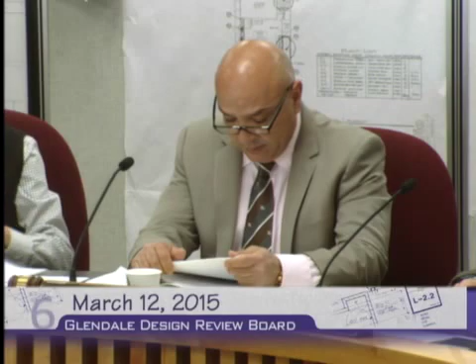Thank you, Vilya. I'm going to turn it over to Ms. Kathy Duarte for 1045 Linden Avenue.

Board members, the property at 1045 Linden Avenue, you can see from this map, is located south of Glen Oaks Avenue and north of San Fernando Road. It is located in our R2250 multifamily residential zone, on the west side of Linden Avenue.

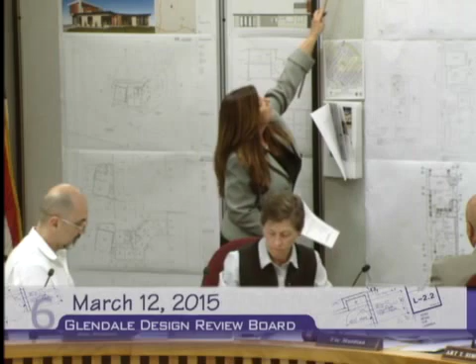If you look up here at the existing site plan, there's an existing approximately 900 square foot single-story Tudor-style home at the front of the property. The driveway goes back. There's an existing garage, a one-car garage, an existing orange tree, and then an existing rec room at the very rear of the property.

The applicant is proposing to demolish the existing garage, the orange tree, and the existing rec room. At the front of the property, with the existing one-story per code requirements, they will be adding a new 2-car garage.

And then at the rear of the property, they're proposing a new 2-story, 2,276 square foot unit at the rear with a 3-car garage that fronts the alley. Access to the front would be on Linden here, for the front of the property, with the driveway going along the side.

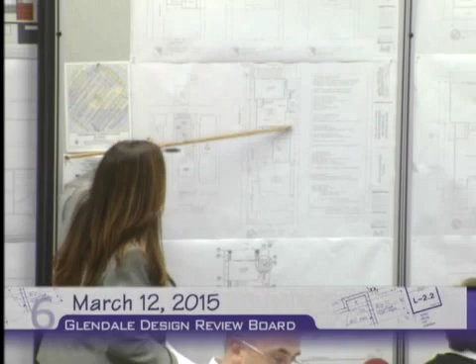They are meeting all the current zoning code requirements. They have the common open space located in between the two units, and each unit will have a private patio.

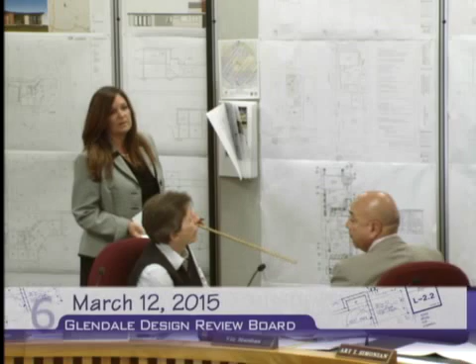That's in terms of use. So I mentioned that the property is located in the R2250 multi-residential zone. Most of the surrounding properties are also zoned R2250.

The landscaping will meet code requirements. They're proposing approximately 30% of the lot be landscaped, where 25% is required.

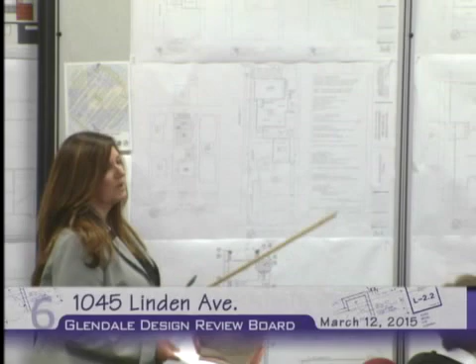There's an existing wall along the west side of the property. They're proposing to demolish the existing chain link fence, remove that, and add a concrete masonry wall.

Staff is proposing that, because they're proposing it be stuccoed on one side, staff is proposing that it be concrete on the other side, facing the neighbor.

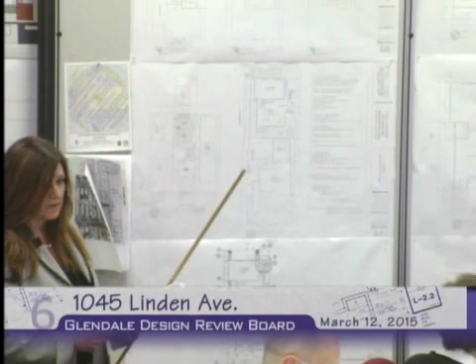When you say concrete, meaning it's a masonry wall, so exposed masonry. Our typical request there is to use the split-face block. We thought split-face wasn't as appropriate on the side facing the subject property, so they would stucco that face, and then the split-face, which we can't paint, would be a nice finish for the neighbor. So it'll be split-faced facing the neighbor.

Moving over this way, we have the proposed floor plan for the existing house here, with the elevation drawings here. You can see they're adding on the garage over here. And then these are the floor plans for the rear unit here with the elevation drawing here. As you can see, the styles are a little bit different.

And while the Tudor style is different from that of the proposed unit, we feel it would be difficult to design a compact two-story unit that references earlier style without overwhelming the adjacent neighbors. And the height of the new unit is actually lower than the existing unit, so it should be hidden behind it.

Also, the inverted roof angles of the new unit can be seen as a playful take on the Tudor roof forms. And in addition, there are a number of 2- and 3-story multifamily dwellings in the immediate vicinity, including a 2-story structure directly to the east of the property.

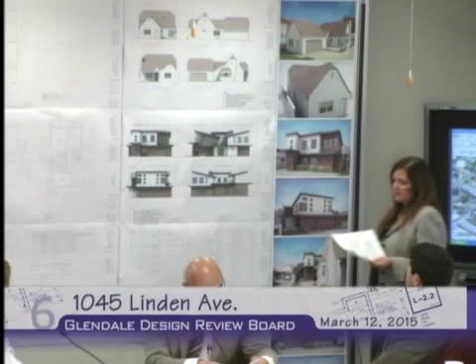That's my presentation. If you have any questions, or if you want me to go over the conditions.

Is the trash area enclosed in the back there? I believe it's behind the fence. It looks like it's open as well. Is it behind? Where, the trash area? Yeah, right adjacent to the garage. To the right of the garage. Right.

Maybe he could answer that. Is that the only location for that trash area? With unit 2? I think so.

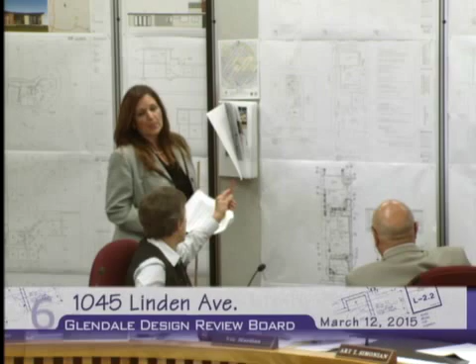And the other question - that wall they're proposing, does it only go to the front of the rear unit? I believe it ends here. And what are they doing with the little 20-inch wall that's along the side now that goes partway from the front street? It's not showing there. But there is a wall - maybe he could address that. Any questions?

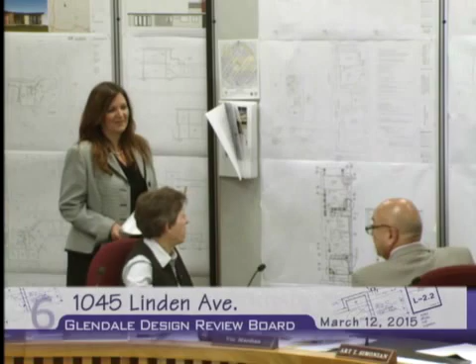I'm trying to understand - it says new unit, 2-story, 2,276 square feet. Then on the side it describes the proposed total floor area as 3,185. So I'm assuming he's adding the existing and the new together. But my question is, was the 3 parking garage a requirement by the city or their own requirement?

It is a requirement - based on what? Because it's in the multifamily zone, based on the number of bedrooms. So based on number of bedrooms they need to have, okay.

The 3, then the 727 square feet for new unit garage - that's not like the residential where you're going over a certain number and you get added onto the floor area, right? Or is it just - correct, okay, because it's required parking. It's not livable floor area.

So but it's included in the calculation of the floor area when - no, it's surface, not park. Where is it? I think usually when you have a garage, it's on grade, the garage area goes into the floor area ratio, but I don't think - oh, well no, it goes into lot coverage, not in the floor area. That does go into floor area ratio because it's on grade - it's part of the, based on what I understand.

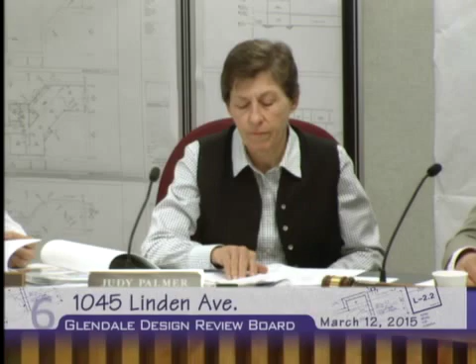Second question: is that little wall in the front off the street on the left side of the driveway going to remain? That's actually on the neighbor's property. Oh, that's the neighbor's? Yeah, exactly.

I was over there yesterday, and I was wondering how you get out of the garage without making 3 turns to come out of the driveway. It appears, as you back out past the patio, you've got to move 3 times. Right, I mean right now we just back out. That's the existing condition, that we just use the garage.

Everything is as far as the backup space, the 26 feet, I believe, is there. It's 25, just right, an awkward position. There's really nothing we can do about that turning radius.

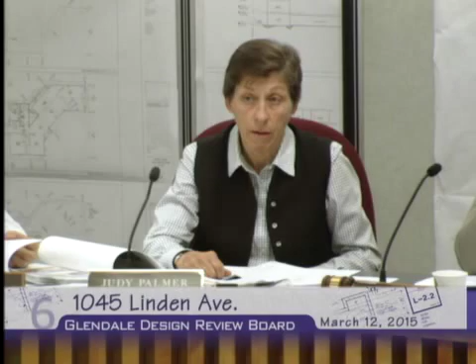Could take away that little patio. That's where the corner becomes an issue with the existing patio, which is part of the private space required for the house. We're required to have 50 square feet, but it could be smaller. I'm just saying that corner doesn't allow you to get out.

Sure, just a question. We can. That's all the questions I have.

On the same note, on the trash area, where's the front unit trash area? It's all supposed to be just one. So how do you access the trash area from the front unit to the back? We have a walkway on the side, so you got to go to the alley, then come in. But you propose landscaping in that area, and if I have these trash bins, I'm going to roll them, what happens to my landscape area? There's no designated path for that particular trash area.

There is a concrete path along the left side of the property coming up from the driveway, but when I come back to the other side where the trash is designated, it's all landscape based on the landscape plan. Oh, I see. We need something's got to happen there. Absolutely, we can make a part of it paved so that works. On the landscape plan, landscape is where the trash is, because you can't put the trash in the right of way - it's just that they have it reversed. I don't know if this is just a different project that was proposed, and I'm looking at the landscape plan.

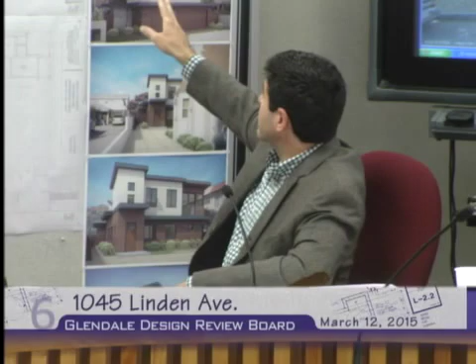So a couple of questions on that note - I noticed that on some of the color elevations, some of the windows, especially where this window is supposed to be in this bathroom area, I would imagine these windows are really going to be high windows like that. Have these been amended at some point? Is this like an older version? No, I think we are going to have the windows exactly like they are on the elevation. The ones from the bathroom are going to be frosted too. So in essence, they're going to fall more or less where the toilet is right now, the lower window. I see.

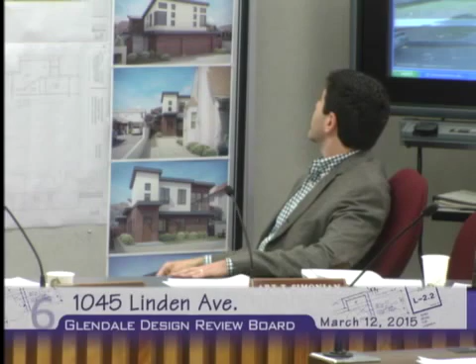And then in this rear elevation facing the alley, there's an abundance of windows. Is there a specific reason for all these square punch-outs? There are accents that accentuate the design, and we went back and forth several times refining it. But we definitely used the clerestory windows to show the heightened, vaulted space inside.

Are they all going to be clear windows, or are some frosted? The ones in the bathrooms are definitely going to be frosted. But besides that, everything else is? Everything else is going to be clear, yes.

And insofar as your bedrooms are concerned, they're looking onto a multifamily building. Have you considered what they're looking into with all those windows? Absolutely. I actually have a diagram here that shows the neighboring building and which windows match with which of the neighboring building's windows. The neighboring building is actually about 6 or 7 feet higher because they have a subterranean or semi-subterranean garage, so our building sits right in between their windows. Our second story sits right in between their windows. I can pass this on, if you'd like.

The ones in orange show the neighboring building, and the ones in green are our windows, and we made sure that nothing was looking directly into the other. So if we're looking out from your unit onto the adjacent property, we would see those orange windows. Got it.

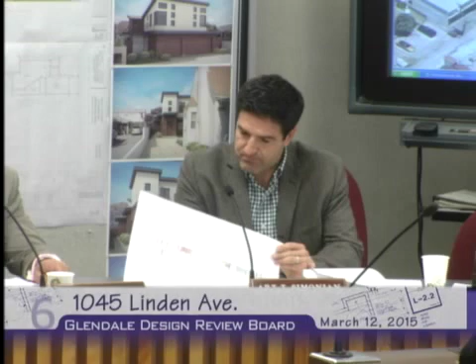As far as the setback, it's a 12-foot setback, separation from building to building. The 10-foot 11 I think was where we had an overhang on the proposed two-car garage for the existing unit that was overhanging a little bit there.

So I have another quick question. You mentioned you started out with Ms. Reich some time ago, about 3.5 years ago. Long time. Yes, it's been a long time in the making. And your original concept, was it more of a traditional concept? It was a Tudor style design, and it was humongous, just too big. And we came back and refined it to a more contemporary design.

And I think when we came back with Mr. Platt, we actually lowered the roof shapes. The lowest point is actually 7 feet, and we made those parts a closet on the interior, so that on the edge, on the higher parts, they're not too high. Your preference to go with the more contemporary or traditional? I would prefer them contemporary. All right, that's all the questions I have.

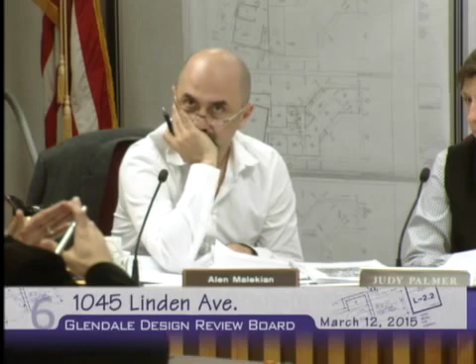Thank you. Just a couple of questions. Can you elaborate on this inverse angle you started talking about? What is that? Absolutely, we took the angle of the existing roof and did a 90-degree turn, and that was our original roof angle, and then we slightly adjusted it. It's not quite the same slope, it's a little shallower - it's a pretty steep slope on the existing house.

One more thing I should add is that the new unit is actually lower at the highest point than the peak of the roof of the existing unit. And it's definitely lower than the two-story building next door to the east.

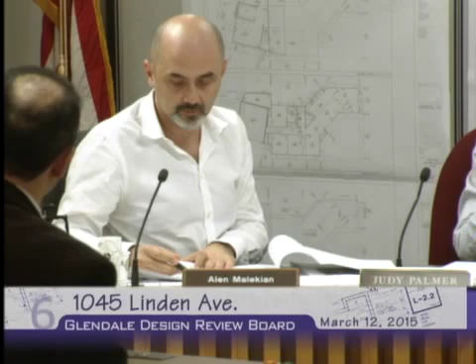So some of these, like the windows, as Mr. Simeon suggested, and some of these headroom heights - have you looked at these and addressed them in any way? For example, the 7-foot-one that you're showing in the studio, and you have a door right along that wall. 7-foot-one is not an allowed height in a habitable room. No, and we have a closet there. Well, there's no closet shown there. So if you look at your section, you have a 7-foot-one, and I'm just wondering about certain elevations there.

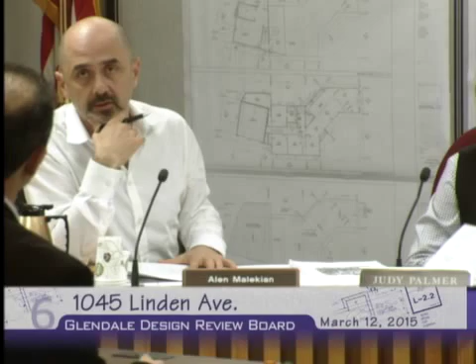In other words, the plan doesn't show a closet there. Well, it's not showing the closet, but it's showing the door coming in here. So if you look at the section through here, this point is 7-foot-one. So I'm just wondering, is that going to affect the angle of this arbitrary angle? And like Mr. Simeon said about the window, that window is right behind the water closet. So I'm wondering if you've looked at this code-wise, because these things are going to come into play and be dictated by building and safety. But I do believe 7 feet is the lowest point we can go. 7'6" is the minimum habitable height.

I'm just wondering, because looking at the design of the project, it has some symmetry in certain portions of the house or structure, and then as it comes around, the symmetry goes away and you start adding certain details that aren't carried through all around.

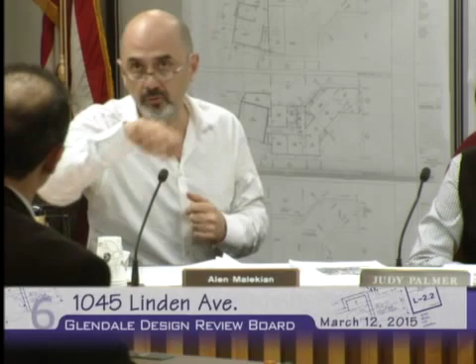So I'm just wondering, have you gone through this in a code sense with building and safety? After you've had a whole review of these drawings, is it not going to really impact the design we come up with at the end? Have you done that? Do you feel comfortable with what you have?

Right, we've been going back and forth. Well, I'm not talking about planning, I'm talking about building and safety. As with every project, if it goes through plan check and there are changes that affect the design, it's brought back to us, we review it. If we deem it a minor change, we can approve it at staff level. If it's too big a change from what you've approved, we'll bring it back to the board.

Okay, alright, thank you. Thank you, I don't have any other speakers. Thank you, Mr. I don't have any other. Oh sorry, you can, I forgot to mention something if I might.

I did receive four written emails in support of this project this afternoon, which you have copies of, and I also received one phone call as well in support.

Okay, thank you. All right, I'll close the public hearing. I'll start with Mr. Malekian. Thank you, sorry, open up the dais.

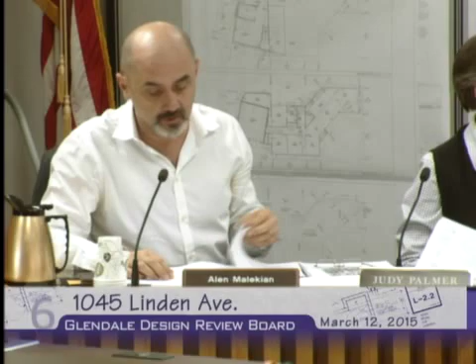I could very easily say it's probably the first project I've seen in many, many years that has an addition to an existing property that are two completely separate architectural styles. Usually I don't get into the style of architecture, I'll just leave it up to the applicant, but in this case it's just given to us, here it is. You have this very traditional, thick architecture, and then you're being proposed something completely new. I wish we had a complete wall between them so you'd have two separate buildings, but we don't, so somehow we have to look at this whole thing as one, being that they're both being presented to us, especially that we have a garage added onto the front of the unit.

So I'll go ahead and comment on the front unit first, then I'll go to the back, and then comment overall on my thoughts. For the front, a couple of concerns were the trash, which was addressed, so I think we can definitely address that, and also the turning radius around for the garage.

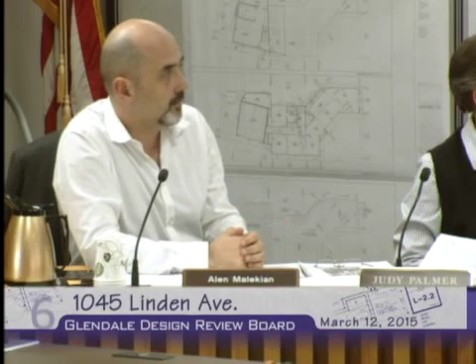I'm not that concerned about this because it follows the architecture of the existing building. The concern I have is that the structure being added, because it's following the existing roof lines, is creating this huge mass in front of these spaces that are very close to the habitable space on the other side of the apartment. So they're basically creating a wall in front of it, which is fine, I don't have an issue with it, but it is following the roof line, so they are following some of the profile, I guess you can call it.

If it can be somehow massaged or mitigated, I would really like that. But at this moment, the way it's done, it's fine. That's the only thing that stood out, and I was a little concerned, especially that perspective on top, you can kind of see how big that roof line structure is going to be. So rather than just carrying the existing roof, the lower roof over to carry for the garage, that was one concern I had on the front.

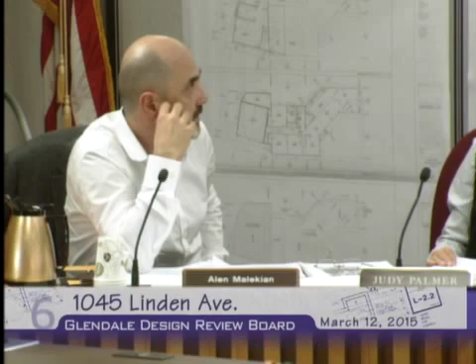Looking at the back, I'm personally fond of modern architecture. I love seeing this, but I also like to see a design that is throughout and consistent with all the details being proposed, which in this case they are doing. I think all the conditions around the house are well thought of, all the details are well placed together. But there are certain things happening that I'm just wondering, is it really necessary to achieve this modern architecture?

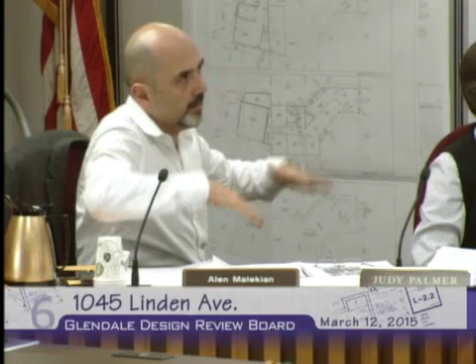I really don't see why, if this is going to be two different things, and if it's truly an inverted roof line, then let it be a truly inverted roof line, with roofs cutting through the space, creating morphed architecture that takes the existing roof and creates interesting spaces. But it's not—it's basically just a convenience of tilting the roof and sloping water back into the building space. For me, it's not doing anything. I'd be fine with just having a flat roof, playing with roof lines, and creating clean, simple, minimal, modern style architecture.

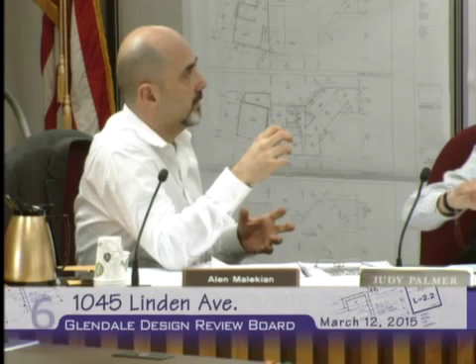Some of these windows—the placements and proportions of the windows—for me, again, it's questionable. These small little square windows, and the placement of them... I appreciate that it's helpful to understand where they placed the windows in relation to the neighboring property, but it's not helping the situation, because now you've created a window that is lower while theirs is up above. They're looking straight down into the space rather than if it was aligned at the same level.

I'm torn between the traditional and the modern, and how it's merging into each other. I think it's unfortunate it's taken three years for them to get here, and unfortunate that the person who was dictating the style is no longer here for me to ask questions from. But I'll just wait until I hear more comments from you guys, so we'll see where this thing is going.

Thank you, Mr. Malekian. Commissioner Palmer?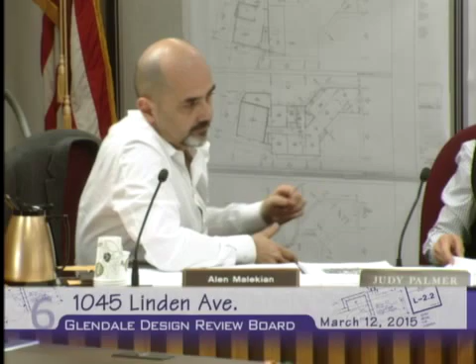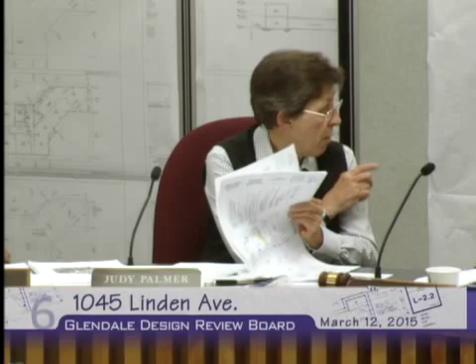I'm looking at the existing garage on the front unit, and I think that whole roof is a large mass. I realize it's matching the other, but when you look at the new garage at 90 degrees to it, it's also a very large structure. In the elevation, the top floor above the garage looks taller than the garage, and in section A8, the garage looks taller than the upper section. So I'm not sure which is correct, but those two units right next to each other being large, with a large flat face... and the house is always taller than the garage.

But in the elevation, A8 is... That's just one perspective, I think, from the street. I'm just saying the garage and the house—it looks large there. Okay, you won't see the garage from the street. I know, I'm just saying between the two units. I see.

I do like the design of that unit by itself. I'm not going to complain about that, but Alen's brought up a lot of points. I'll bring up that when I looked at the landscaping in the driveway area, the proposed driveway from the front shows planting along the existing house, but there's no room for it. It's drawn incorrectly here. The driveway is going to come right up to the bay window and go all the way over to the property line, so that whole side will just be all driveway.

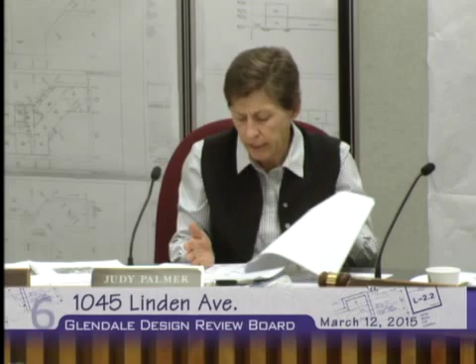They probably could have some planting, I don't know. They've shown trees where you have existing trees. I don't think the landscape plan matches the existing site. We've got palm trees in the front that really don't go with the building, and we have the tree and planting in the trash area. So I think that whole landscape plan needs to be addressed, as to the type of plant material in front of the front porch, taking out trees where we already have trees, and the trash area.

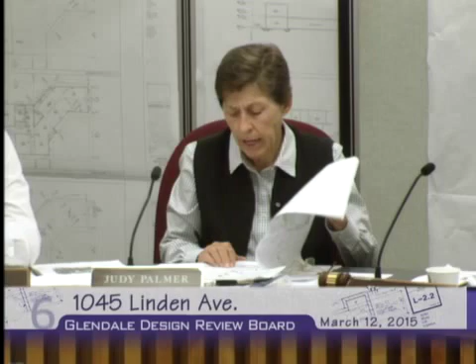I just wonder if that front porch on the existing house could be redesigned and changed, since it's just a little metal awning. We're going to have a whole new building, and to fix the front area—repaint it—maybe that metal awning might be replaced with something a little more attractive. So those are my comments thus far.

Thank you, Commissioner Palmer. Commissioner Simonian?

The reason why I asked some of those more personal questions about whether you were going to live there, and if this was your home, is I sensed we have a young designer who's been given the opportunity to design his home. We've all been there as architects and designers—it's a special thing to design your own home. It really is. You design something and learn a lot from it because you live in it all the time, so you live and breathe it, and you'll learn a lot from the construction through to how a house is lived in and the practicality of how windows are placed and how you access the home, etc.

And it's probably one of the most valuable lessons you'll ever learn in your career. What I'm sensing is there's this excitement, and you're trying to pack a lot of things into this house, so it's refreshing and it's appreciated. So in a humble way, we're going to share some of our experiences, to help you consider some things and see how it could be a more enjoyable place to live.

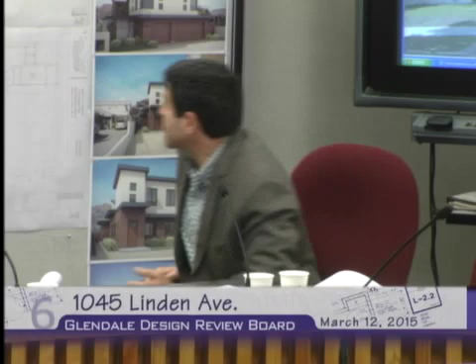What that will do is create—if your entry is more from this direction, coming in from there—some relief over here where you could actually back up and come in, making this turnaround a little bit easier. So you really want to start thinking about this entryway and creating a nice entry.

Right now you just have this kind of 5x5 box sticking out, and it's not a very attractive entry. I think you could work on that, integrate it into the courtyard a bit more, and make it a nice common open space with some privacy from the garage, while also making the garage more usable.

So those were kind of my thoughts—some of these windows are going to end up going away, as some of these windows facing the alley will probably end up simplifying themselves out.

Looking at the other side, at the multifamily building, this setup over here—we have 1, 2, 3, 4, 5 windows in this bedroom. In reality, once you start laying out your door swings, you're going to want to swing your doors inside, then lay your bed out with your credenza and all that, and you'll slowly get a feel for where you want to lay these out.

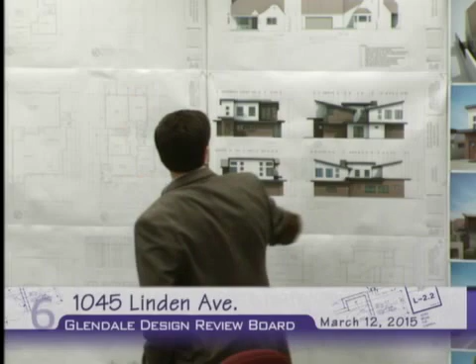So I would imagine this window, and possibly this one, and possibly these guys, are going to get eliminated. Once those are eliminated, the facade ends up simplifying itself.

But overall, I think, as Mr. Malekian pointed out, it's certainly odd to have this kind of mixture of old and new, and it's perhaps driven by Ms. Reich's comments, or maybe a young designer really putting everything he's got into something. But in itself, if you remove everything around it, it's a nice design—it's a contemporary home, well worked out.

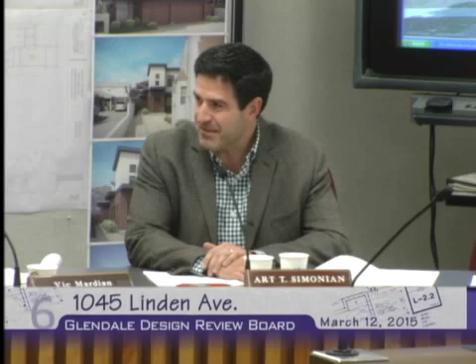Some of those minor details—I think most of my colleagues are done giving advice as far as HVAC placement, trash placement, and all that. I'll make it much more of an enjoyable place for you to live in. So I think it's going to be a nice journey for you, and there's a lot of things that will come up that I think will help you during the plan check process. Thank you, Mr. Simonian.

I share most of the comments my colleagues are making. I want to remind my colleagues, if I understood this correctly, Mr. Jain - correct me if I'm wrong - this came to us on the basis of the style. Due to the streamlined process, this could have been exempt if the approach was more traditional. Yeah, this could have not been exempted - it could have gone through administrative design review. Yeah, that's what I meant.

Based on our outreach and task force meetings when we did the streamlining of our process, we recognized and generally agree that it's best for a back building to have a fairly close architectural relationship with the front building. In this case, we acknowledge that Tudor revival, of all the styles we have, would be the hardest one to get the square footage they were looking for, plus the parking, without creating a real massive structure. So we appreciated Hamlet's version - it's not an exact inversion of the roof planes, but it's a roof that draws attention in the same way a Tudor roof draws attention to itself, and we thought that might be appropriate. But because the direction was typically from the board that we keep styles consistent from front to back, we wanted the board to hear this in a public setting so we could gain direction for future cases like this.

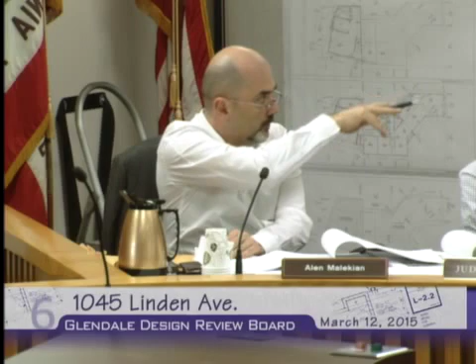You can see kind of a shot through there. That thing is about 12 feet, or it's supposed to be 12 feet. It's just that solid mass.

A flat roof could help solve that. I don't know if flat is the solution. I don't want to create, but I like the roof, it's consistent, but I'm just saying, I'm talking about the garage attached to the front house. Exactly, yeah, okay, exactly, I don't have an issue with that.

The mass is going to be there with this kind of pitched roof with a Tudor. Plus you have to think this house has gone through so much evolution. The roof shape is only a Tudor, the detailing and everything else, the windows have totally been changed. I'm okay with that, I'm just more concerned about what I'm trying to say is that he can get away with something a lot simpler rather than matching the roof, the existing roof, to create this large mass. That's what I'm trying to come to.

So my other question is, and I don't want to get into this really in detail, but I'm trying to understand some of this detail work, because of some of these window placements we have, the distance from the bottom to the roof lines and all that. If you look at the elevations, you have all these different heights given as a dimension. You have an 8'6", and one end you have 10'6", and then the front and back, the elevation is...

Look at the west elevation. On the right side, you have 10'6" from grade to the bottom of the canopy. And then on the left, you have 8'6" from grade to the bottom of the canopy. And then you have 11'2" to the bottom of the top overhang. And then on the other side, you have 9'2".

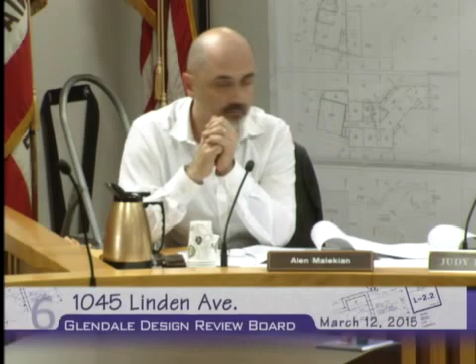We can probably approve it, but by the time you're done correcting all of these details and elevation heights and canopies, and I understand you're trying to create some interest in the canopy, you don't want to create that flat, but the section is already creating a flat section.

You don't have steps in the second floor. You have it all flat. You don't have any steps. But when you look at the exterior, you have all these things happening, the heights and elevation, and none of these have been translated between the section and the elevation.

So by the time you're done, you may end up coming up with a whole new design that may not actually look like what we're going to be approving, because of all the reality, all the structural issues, all the code issues, and so forth. So...

I don't know, I do agree that if staff is willing to take on this challenge, I can foresee this having quite a bit of structural issues and code issues and stuff.

So if you guys were comfortable doing kind of a staff review on this, and we just let this go, and if they're done with all these design stuff and come back, looking at the drawing, I'm seeing some drawing errors right now where some of the heights were measured to the top of the fascia, some to the bottom of the fascia. That could be part of what looks inconsistent.

But yes, I think we've heard about the windows and some of the other issues, and we can easily work on those, and we can recommend that the applicant try to speak with someone at Building and Safety to just get some sense of whether the ceiling heights will be too low, or if there are going to be radical changes to the forms.

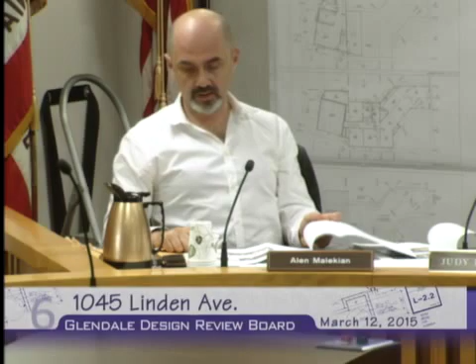Well, the entry canopy, yeah, the entry canopy on the elevation shows 10'6", but when you look at the section, it's actually 8 feet. Yeah, the section, I think, is cut through the living space, and then the entry has a higher awning that's cantilevering out, but similar.

Then the entry's on the section. Entry's not on it. It's section. Not on the section, the entry.

Just trying to help. No, Ms. Palmer, of course. You had a question?

Adding to that, when you're on the site, there's about a 12-inch grade difference from the house as you go across the site. We don't have a grading plan, but does that affect the new house on the left side of the property, which is lower than the right side? Because when you come out of that garage, you drop down almost a foot. I don't know if that's the full length of the property or just where the proposed garage for the front unit is, but that might change things also.

I just want to go over it with the... Commissioner Palmer, Board Member Palmer, you're talking about the slope across the narrow lot?

Across the narrow lot, you come out of the little patio in the back, and it comes down 3 steps, and then it dips down to the left property line, and then it goes to a hole in the back.

Okay, I see, yeah. But we don't have a grading plan, so I don't know if that affects the building or the height of the new garage on the front unit, or if they don't have enough dirt, they'd have to take out the foundation. I'm just saying the way they've shown everything flat across.

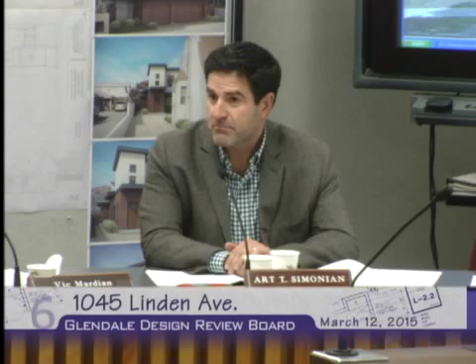I'll entertain that motion then. Okay, I'll second that.

Could I get clarification on a couple of points? In terms of the square windows, considering it was important to the designer to have that appearance, if they removed, for example, the lower two square windows and found a way to create more of a clerestory where the wall space wouldn't be compromised as much, would that be a compromise solution for the board? I'm happy with that, yeah, because that will simplify it. Rather than eliminate them totally, we can have less of them.

That's the simplification we're looking for. When we look at these elevations, it's just too busy. I don't see the windows clearly, and I don't see some of the roof shapes that are taking place. But simplification will definitely help it.

Board Member Palmer had mentioned the metal awning at the front. Is that just a comment? Okay, so not a condition. It'll help, but we'll leave it.

And then for the garage roof, if we lower the height and change the pitch, does the board have any recommendations you can visualize, or should it just complement both, not be totally foreign to the front and the back? So what if they put a shed roof on the garage sloping down toward the neighboring building, to start tying them together a bit?

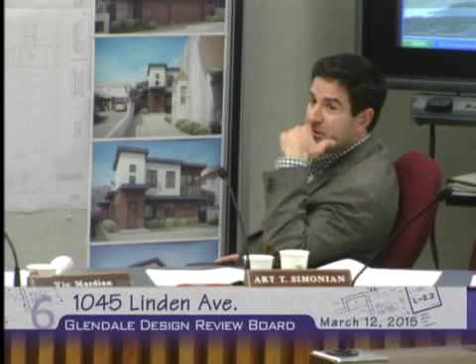So the apartment building portion of that roof would be higher? No, lower, that's what I was picturing. Okay, I thought you were sloping toward the new building. No, it's sloping the water towards the apartment building. Perfect, okay, we can recommend that and see how that looks. And I think that was the only question I had.

We also need to revise the landscape plan per the comments. I'm sorry, yes, I have that — correct all plans, actually. And what about the AC? Okay, we're going to remove the palms at the front, provide more appropriate landscaping there, and also check the landscaping at the driveway, where they've planted trees where existing trees don't need to be removed. And the trash area has landscaping in it — we'll rework that, make sure we have enough landscape coverage, but we'll find a place for the trash.

Going back to that roof, you have one more option to look into - there's already an existing roof line there. So they can carry the ridge of this over, to wherever the garage wall is coming out. Carry this line over, follow this side the same slope, and flatten the roof a bit longer on the other side. So if it's a 12 and 12 slope right now, the front end will be 4 and 12 or something - you can carry the existing ridge line.

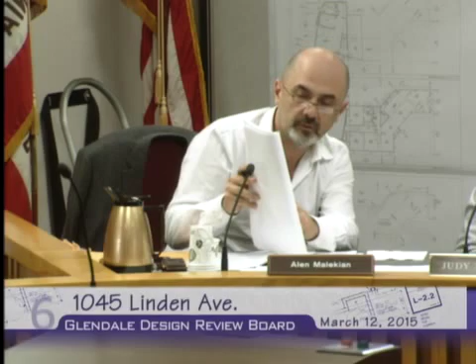So you're flipping it - this side will be the same, so this roof will carry over, but this side will be flatter, so you don't have to go all the way up and create that mess. So rather than tear the existing roof out and create a whole new mess, they can do that.

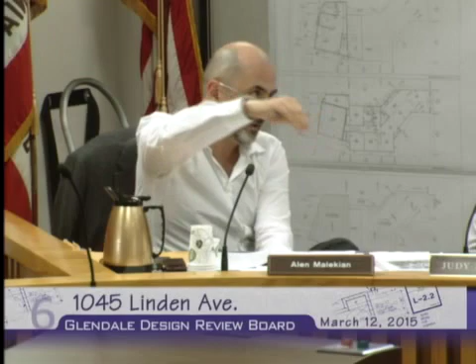It's another option. So we almost have like a mansard without... it'll die into the existing ridge line, so that can be carried over. It will just be an asymmetrical gable.

Okay, and last thing, I don't know if you got that - the AC unit, we're doing with it. I wasn't sure if we heard concurrence on that. The code allows the unit to be on the roof, and the furnace is usually inside the house. Code also requires them to give access, so we can work to make sure there's a roof hatch.

The roof hatch is needed because if you're going to put a package unit, it's got to have some separation between the screening and the unit itself, so it can breathe a little bit. I think that's going to even create a bigger mass on that roof.

Now, that middle portion of the roof, in my opinion, could get a little higher and squeeze the furnace in there with the condenser outside. If you concur with that, if you're happy with it, you know.

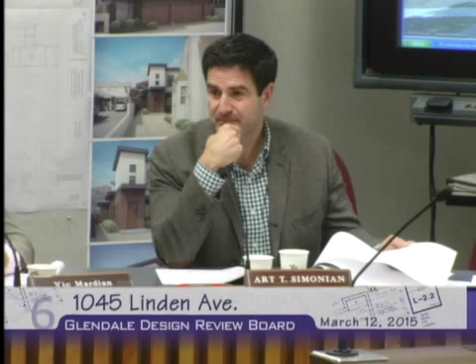Well, he needs access, so it's got to be worked out - these are just comments to help you out. You're going to need access to it, so something needs to be worked out. Provide that, either making that middle part bigger or doing a split system. They can explore that.

They can put it right on the side yard and then put a unit on the ground floor, right behind the kitchen. They have so much square footage there, it doesn't actually have to go into the attic.

Well, if you have a good suggestion, maybe make it - it might help them out. Because you have so much space that you could take out and put the furnace in, vertical furnace rather than a horizontal furnace, because it's creating that chimney effect kind of - that could really help.

Certainly at the end of the closet of bedroom number 3, right where the number 4 symbol is, right here - it could be there. There is room to put that vertically, because that already is a very big closet, and by the time the door swings, you won't be able to access some of it. So that will eliminate that whole thing and the whole access to the roof.

And then have the condenser somewhere along the side yard, the setback area. Put it on the east side of the kitchen. You can even put it behind that bathroom on the first floor.

Well, go ahead. I just wanted to reiterate, we appreciate the excitement and what you're doing, and a lot of these comments are really to help you, so you end up having a much easier time going through building and safety. It's not an easy task to take on as a young designer, but you're doing a great job, and if you integrate a lot of these thoughts in there, you're going to have a very successful building come out of it.

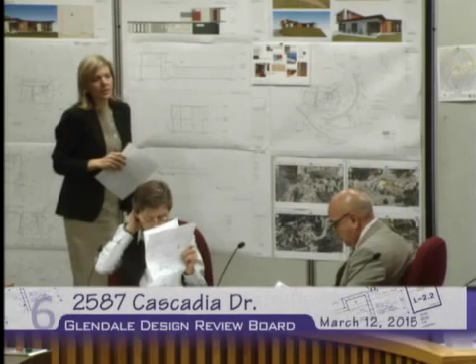The detailed staff report was broken into 3 sections, the first being site planning. As I've already indicated, the existing single-family home is 1-story and sits on a knoll, fronting Cascadia essentially on 3 sides. The existing winding driveway will remain but will be resurfaced.

The applicant is proposing a small 21 square foot addition of a foyer and an 88 square foot addition to the rear for a kitchen and small bathroom. The existing carport will be demolished and replaced with a 2-car garage with the master suite above. With only minor additions to the existing building footprint, much of the site planning remains unchanged, and is consistent with the design guidelines and compatible with other residences in the neighborhood.

The second portion of the staff report focused on mass and scale. The project features a new 2nd-story addition to the existing single-story house. All other homes in the survey area are 2 stories, so this was the last remaining 1-story home in its vicinity. The 2-story addition will have an overall height of 21 feet 2 inches from the existing building pad finished grade. This is an R1R zone, so they would be allowed to go up to 32 feet in height, or up to 35 feet with a pitched roof.

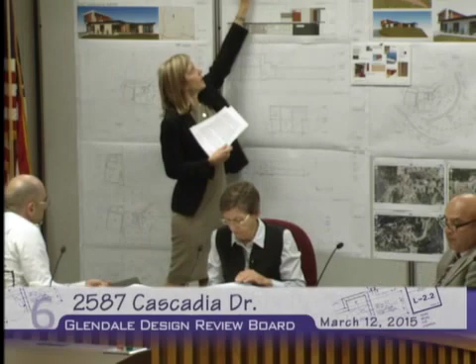The two-story addition and massing are concentrated on the far west portion of the home, above the two-car garage. There are no homes on either side of the property; both lots on the east and west are vacant.

And the neighbors to the south across Cascadia Drive, all of those homes actually sit at or below the street level. As per the Glendale Municipal Code, there are no views from the living room, den, dining room, or other public rooms or balconies directly onto the properties below on Cascadia Drive or to the residences to the north.

There is a proposed rooftop deck. You'll notice here on this particular elevation, the master suite is up above the two-car garage. There is a rooftop deck that is proposed. It will feature a screening element on its north side to limit visibility to the property to the north.

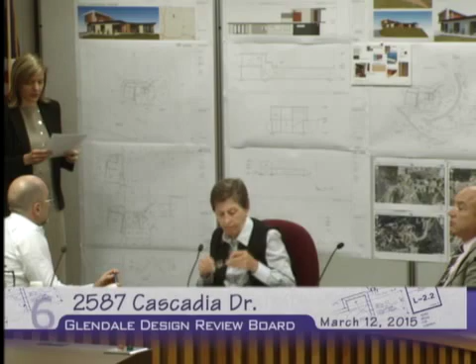Also, the northerly elevation of the second story has been designed to address any privacy issues regarding such neighbors. Given the slope and topography of the lot, as well as the overall minimal building height and the design of the second story, the proposed residence will not unreasonably impact the privacy of the neighboring buildings. Also, because of the changes in grade between the properties and the overall height, the proposed massing for the house is compatible with the existing development and is consistent with the design guidelines.

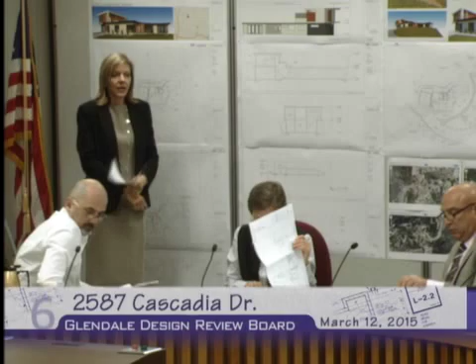The last topic noted in your staff report was with regards to building design and detailing. The intent of the applicant's proposal was not only to add the new two-car garage and the second story above, but also to update the existing single-family 1956 building. The project's design and detailing continues to focus on clean lines and simplicity, while also incorporating modern finishes and a minimal aesthetic that complements the existing residence's somewhat mid-century architecture.

There's a contemporary second floor that also has a combination of glass balcony and railing systems. There are also wood brise-soleils and projecting bands that emphasize the rectilinear geometry. The flat roof, accent bands, and brise-soleils provide a horizontal emphasis on the new addition, while the proposed materials give it a more contemporary, updated look from the original 1956 house.

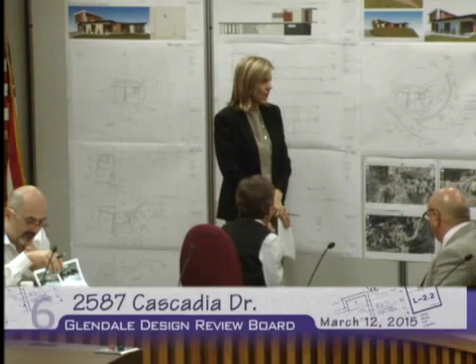Have you been to the site? Because that's a vertical cut, and we're putting a new building there. Is the code going to require some sort of a wall there? I have been to the site. Jay Platt and I actually walked all around the site, and we also went up to the adjacent property owners, the neighboring site as well. And they are only proposing, since this isn't a new residence, to demolish the existing carport and put up a new two-car garage with the residence above.

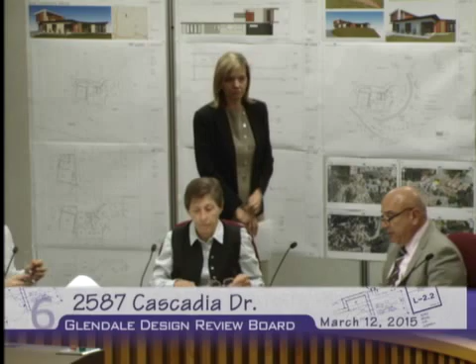Hi everyone, wow this is exciting. I'm really glad to be here. This is a great opportunity, and thanks. It was fun to sit back and hear someone else talk about a project that we just put together on a cocktail napkin before we came in here. I'm just kidding, actually, we're excited about this.

When I first found this property, what drew me to it was as we drive up Cascadia, it just gets better and better. And it was like, what is that up on the hill? Apparently it was an older Japanese couple that had lived there, and I think the gentleman built it in '56, beloved by the neighbors around him. When we walked into the place, it was in disrepair and dire, but the bones of it were really solid concrete, great tongue and groove ceiling, gorgeous beams. I just pictured Frank Sinatra landing there on a helicopter.

When I was working with Pierre, my designer, it was, let's just update this for the 21st century. Everywhere around there you've got gorgeous new buildings, a lot of neat, unique buildings. It wasn't until a while later that we looked up and noticed the planned community above. Fortunately, that's a separate property area, and we're part of Chevy Chase Estates. I feel that what we're presenting here is just an updating to a classic style. We want to update the rest of the house, and where we're adding the garage, that's part of contemporizing.

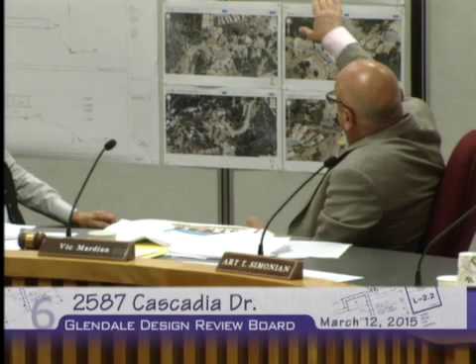Why is there - because now I see the elevation and I see a break. The floor is a little higher than the existing roof, correct me if I'm wrong. It shows better on this elevation, right there. What's the reason behind that? Why are we having the second floor line not in line with the eave line? With the eave line, it was just for design intent - we want this form resting on top, independent, resting on top of a pedestal, so that the form flows.

And back to the driveway - is that because the driveway, I mean the whole house needs repair, but is the driveway going to be totally replaced? Yeah, it needs to be totally resurfaced. My concern is you have this vertical hillside slope cut in the back - you're not intending to put any retaining walls? Well, we did get a soils report, and it says everything seems fine, and we're okay with shallow foundation.

I think the distance from the existing hillside cut line was about 4 or 5 feet, but if we go to plan check and they ask us to do a masonry or retaining wall, I think you're going to - I'm just giving you a heads up, because you're putting a new structure close to the slope, so you may end up with a wall. Okay. And the other thing - I should have asked staff earlier.

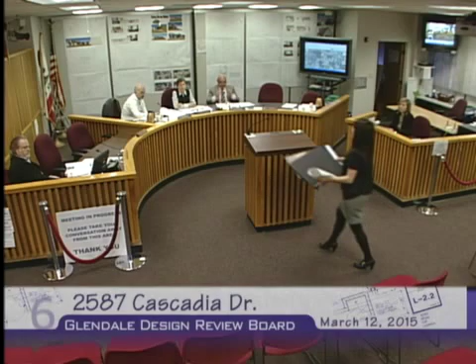Thank you for giving me the opportunity to speak.

We are the house to the north, behind the property, so I think people forget that there's a house behind, but we are the only house adjacent to this project that they will build. We already submitted our letter of concern, but I wanted to highlight the main concern we have right now: the positioning of that second floor.

Our main windows face the area where the developer wants to put the second floor, and what that does for us is create a real problem. I wanted to show you, from our family room, which is a big place where we spend a lot of our time, what the story poles look like.

This is not minimized to us. This is very large, very dominating. It really feels like somebody's building it into our backyard, because the way our property is, it's very open. And this makes it very intrusive.

There's more than just a view problem here. There's a problem of privacy. The best way I could show it to you is a picture from the applicant that I focused in on. The angle is a little off because they took it from a different angle in our yard. But if you just focus on the area we're going to see from our main windows, you'll see that the master bedroom is going to be facing our house.

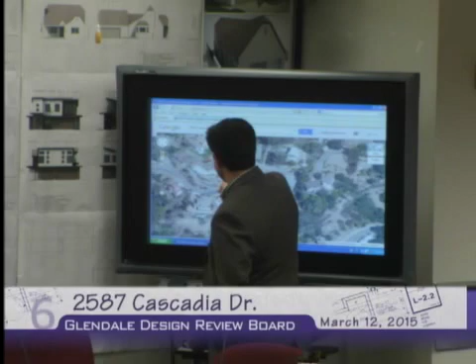It's the hill right on Cascadia that we're all referring to, which if I could approach the board, I'd like to show it. It's really this hill in this area. So this is Kennington, that's Cascadia, and it meets over, and this is probably the steepest part of the property, and as you look up, it's basically like a straight wall up.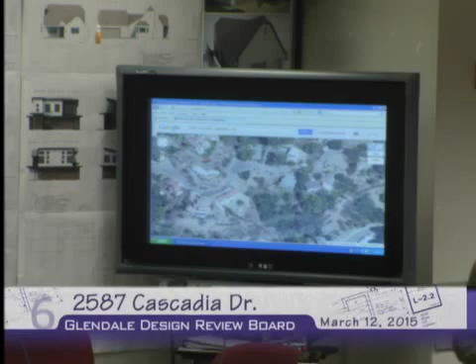There's some existing vegetation up in that area, which consists of sumac and oleanders, et cetera, which are more like bushes, which certainly could be cut one day. Although right now they're screening the eastern portion of the home, which is where the fireplace is, if you look at the plan, but if they're cut, then there's more direct contact.

So I'd recommended to Pierre to keep that landscaping the way it is, which he thought was a good idea. I also recommended that windows 1 and 2, which are on either side of the fireplace, be solid at the bottom and turn into high windows, and he thought those were a good idea too, so that in the case the landscaping is cut in the future, we wouldn't have direct eyesight with one another.

The third item was the new proposed deck on the second floor of the master bedroom. There was some screening on the north side that he's proposed, continuing it on the east side, maybe as far as 40% of the deck, where it would line up with the two lounge chairs, and he thought that was a good idea.

Overall, the massing and the layout I think is the appropriate solution, because they're adding the garage and really building on top of it. If you move it to the east, it's always going to affect somebody, but in this location, it's got a minimal effect on the surrounding homes. What you mentioned, Mr. Marty, about a retaining wall, I think is a good idea. Every time after rain, that entire hillside ends up eroding and falling down, so I think that should be considered as well. If they're amenable to those points, I certainly would support the project from a neighborhood point of view, and those were my thoughts.

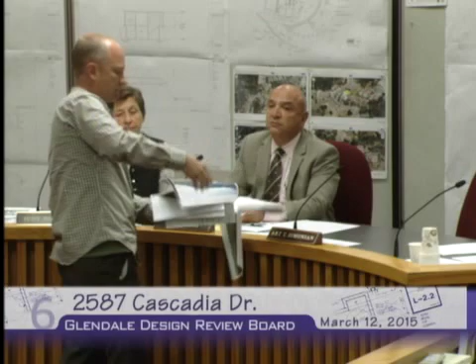This here, if I may give this to you, you can choose to read or not, is pictures of not only what it was, then with the deck what it was, then scaling it back with a couple of options of the scaled back versions we have, and finally with the native plants as we suggested. Within the email correspondence I said, hey, I think we've come up with a solution, and then finally they wrote back and said, you know what, this really isn't going to work for us. I'm not trying to jump on them, I just want to be clear about what sort of outreach we tried to do in a neighborly fashion to bring this to a quick solution so everybody can feel good about it, because everybody who has spoken seems to agree that it's a tasteful rendition of the property, which currently is in major disrepair.

So let me ask you a question, what is this, was the extension over the... That was an old design. I'm trying to understand if this extension is on this side or here. Mind if I? Sure, it's hard to see. I'm assuming they're standing here taking a picture. Sorry, it's hard to see from back there, but yeah, we're here taking a picture this way, and what this used to be was jutting out more there, so we cut it back, and now there's no deck that wraps around there.

Anyway, thanks a lot. Thank you. We appreciate you meeting with the neighbors. Any questions before we close the public hearing?

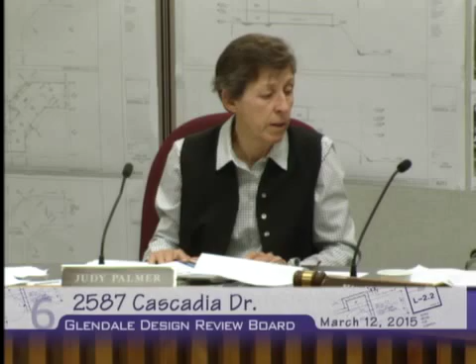Thank you, Commissioner Palmer. May I clarify one point? On the landscape plans, it shows several locations to remove dead bushes—were those already removed? I don't think dead bushes should be removed; there's a lot of weeding to be done, but anything that's a viable bush should not be removed. And if plant screening can be placed up above that addition—I don't know where the poisonous plants came from, but something indigenous to the area that doesn't go higher than the wrought iron railing would be sufficient. Thank you.

So two quick comments regarding privacy and also the view. As a design review board member, we're here to review the design, and unfortunately we do not have any authority addressing view obstruction. If there are privacy concerns, we would definitely address those, and I'm going to talk about that a bit. But as far as view obstruction, we do not have the right to reject or change the project because somebody's view has been obstructed. That's something you have to take to the council, and it has to be addressed to them.

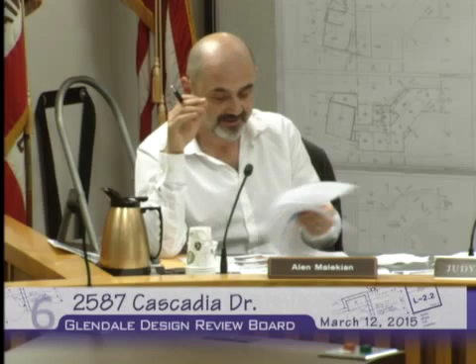As far as the overall design, I think it's done exceptionally well. They've done a really nice job—very clean, minimal, keeping the existing bones and structure and the window placements, just keeping it very minimal and a no-nonsense approach to the whole existing structure. I would suggest revisiting the front entry—that door, if it's going to be a solid door, it's going to get slammed with the sun and warp, becoming a whole mess on its own. So a little bit of protection wouldn't be a bad idea. The first thing that jumped on me, and I know a lot of people will argue with me, is the proportion of the addition versus the elongated building itself.

I love the way it's designed and placed, going over a new structure. I like how it sits over the existing plane, giving a break and hiding imperfections of the existing roof, which is great. But I think it just looks too cut off. The addition looks really like an addition rather than an extension.

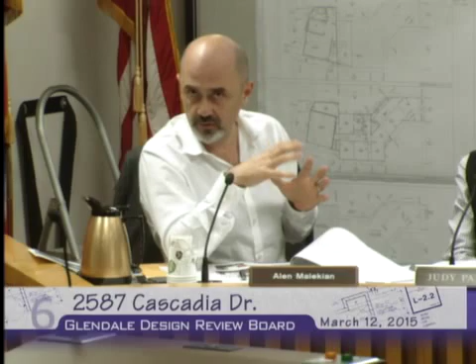This is a suggestion, a recommendation, not a condition, unless you guys agree with me. I can kind of explain by looking at this perspective.

I think this perspective tells a lot compared to what I'm looking at here, or even the elevation. The elevation shows this elongated span of structure, and then this attachment is there. But when you look at this perspective, it feels like it's merging into each other.

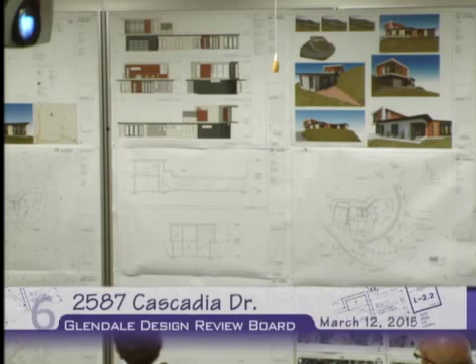My recommendation is that where you have this L shape coming around, take that L shape to the opposite side of the deck area, so that canopy itself becomes elongated. That section becomes a little longer, merging in. Rather than creating a mass, it becomes a void, but still a covering. I think that would tie the whole thing together better, and extend this to make the upper level more in part with the lower level.

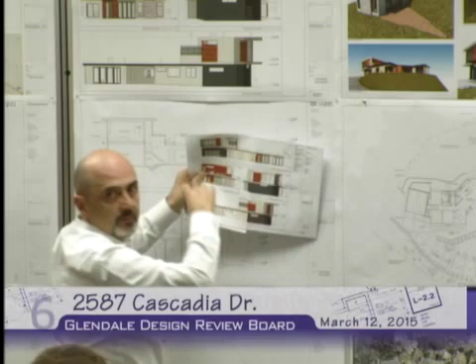I don't know if I was clear enough, but I sketched that up here. Looking at this long band and this little piece of attachment proportionally, adding not a solid mass but a void starts playing with the formation. You sketched it on your elevation on the top one, right? Yeah, it's a void, open on all sides, but it carries that over. It's a recommendation, not just a thought.

Overall, I think the siding, I agree. The horizontal siding is much better than the vertical. I would go with the horizontal siding. Overall, I think it's a great project.

You mentioned you wanted to discuss something about privacy. Where were you going with that? The view, obviously, is not addressed.

For privacy, I think by placing the screen at the back of the building and putting the high window within the restroom, if I'm not mistaken, if the project had come to us without those, that would have been my conditions - placing the screen and moving the window all the way up. I think they've addressed that very well, and it does provide the privacy.

I would actually look at it the other way around - for the tenants to have privacy from the people above, rather than people standing here looking up towards them. It will be easier for them to look down into the building rather than looking up. But putting these screens will definitely help and not give them a clear shot into the restroom and bathroom.

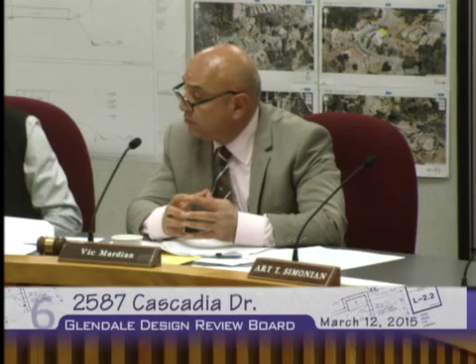I was also looking at the design as far as being top heavy, but I would still recommend that they carry that roof through, some piece that isn't just a little piece added onto this elongated building. I think it needs to somehow merge into this, so that mass kind of dissolves in and becomes part of the whole thing.

Are you saying to wrap it around to the other side, or just stop it like a wing wall? No, the whole roof. And that roof doesn't have to be solid, it can be a trellis, whatever they want to do. But this element has to carry through, I think it needs to somehow dissolve into the existing structure, the new addition needs to merge into that, in my opinion.

Could I also remind the board, another privacy concern was brought up by a neighbor regarding the living room windows, and the potential for adding additional screening on the east face of the second floor deck. But the living room windows, they're not proposing any new openings, they're replacing existing openings, there are windows already. I just didn't want that to be lost in the shuffle.

Did I miss anything, did they add anything that I missed? No, there are existing windows, but they had mentioned they talked to the designer about raising the sill on the two vertical windows flanking the fireplace. Oh, that, yeah, I mean that's fine.

I mean, if there are windows on it... if they agreed, then that's fine. I don't think that's an issue. And then the deck, additional screening at the deck on the second floor. If the architect has... I think the screening they've done, the privacy wall they proposed, will definitely give them the privacy they want. It's just that what they're going to do is create a mass, and it's just a matter of getting...

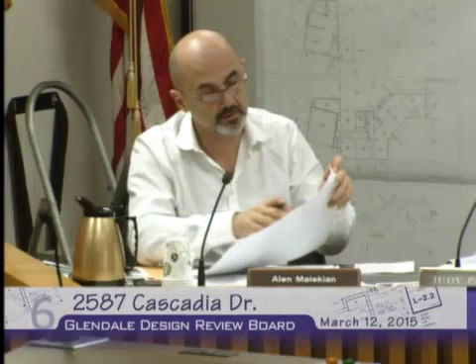The ultimate goal is to get the whole thing down. So, or to reduce both? If they want to have the height, they'll lower this to 9, do exactly what they have here, bring this down to 8'6" by lowering the garage height. Or if they need the height, they can keep the garage height lower, and the landing can be at this level, then they have a step going up to the deck.

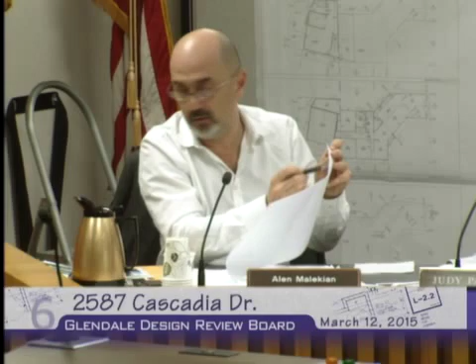So they can still have the deck on top of their existing roof, which is fine. Basically, they'll have either 8'6" or 9'6", whatever. But the idea is that they'll lower the roof. The roof height is going to come down approximately a foot through various means.

And we're doing that to enhance the proportional relationship of the second floor. I think that's what I'm trying to achieve, the proportion. I think it's too plunked on top right now. It's such a narrow piece on the side, it's narrow and long. I think it'll just merge into the existing house much better.

And maybe he doesn't have to do what you were telling him to do. Yeah, that was just a suggestion. Oh, that's not a condition? It is a condition. Oh, I'm sorry.

Okay. And then in terms of the two considerations, the east living room windows, raising the sills is a consideration, and also additional screening along the east side, if the architects agree to that, would be a consideration.

So should we give an actual height that we want, because it's 11.2? Do we give an actual number, or reduce a foot? For the ceiling right now, it's 9'6" inside. We just say to reduce the overall by a foot, however they choose to do so. Yeah, that's probably easiest, and then they can figure out what to do.

So I've got: reduce roof height at the garage addition, the new construction, by approximately 1 foot, to enhance the proportional relationship between the addition and the existing house.

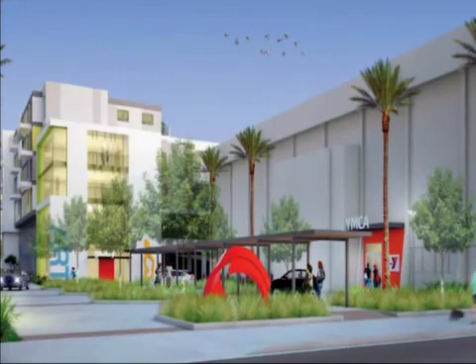This past year, the Housing Authority and the City of Glendale broke ground or opened the doors to 161 new affordable housing options for our residents. The Cypress Senior Living, Veterans Village, and the Arts Colony are among the many ways we're improving the quality of life for our community. We continue to actively seek grant funding to make living in our city affordable and sustainable.

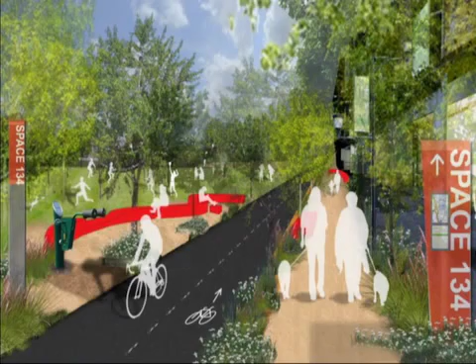Even with our great successes and small challenges today, we have immense opportunities in the future. The Space 134 project is an amazing opportunity for the city to create space where today stands only a dividing gap. The freeway cap park over the 134 freeway will run from Central Avenue to Glendale Avenue to create 28 acres of open space, bookended by meeting spaces, hotels, and the opportunity for endless amenities.

Our urban design team is looking at real money, $500 million, for this impressive 20-year project. The Space 134 project is Glendale's greatest indicator of optimism for the prosperous future. I look forward to continuing to watch our city's growth, refinement, and prosperity.

Accidents happen, and it can be frustrating to wait for insurance claims to be processed. To help expedite this and better serve our citizens and their insurance carriers, the Glendale Police Department has partnered with LexisNexis to make the majority of our traffic accident reports available for purchase online for a $10 convenience fee. This fast and convenient service saves you time by cutting out the trip to the police department and allows you to share the report with your insurance company sooner.

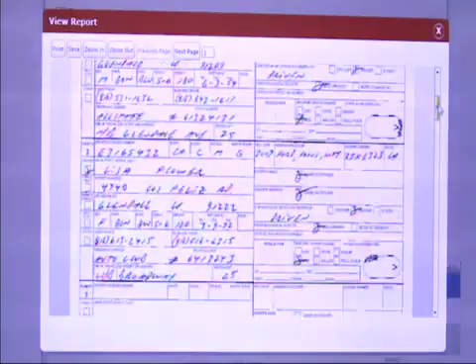Please note that reports requiring criminal investigation, like hit and runs, may be delayed and or not available online. Individuals who do not wish to pay the convenience fee can still request a copy of their traffic accident report in person for $16. The Records Bureau public counter hours are Monday through Friday, 10 a.m. to 4 p.m. For questions, please contact 818-548-3135 or visit ecrash.lexisnexis.com.

The City of Glendale invites you to celebrate the life and work of Cesar Chavez on Saturday, March 28th. This 14th annual event brings together our community to celebrate his dedication to improving treatment, pay, and working conditions for farm workers. The fun-filled afternoon will include guest speakers, musical performances, opportunity drawings, and free carne asada and chicken tacos. Join us from 1 to 4 p.m. on Saturday, March 28th at the Pacific Community Center, 501 South Pacific Avenue. To learn more, please call 818-548-4844.

Glendale Youth Alliance has begun to accept applications for the Summer Youth Employment Program. The summer program provides youth participants ages 14 through 21 with life skills, pre-employment training, and paid work experience.